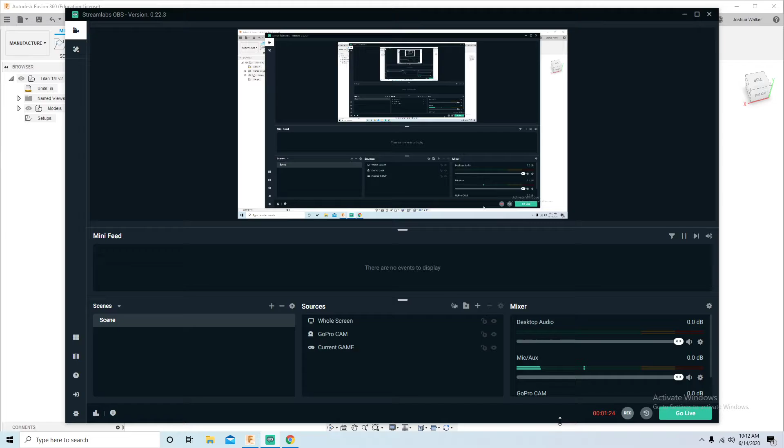This is going to be the CAM tutorial for Fusion360. This is going to be a multi-part series. So today I'm going to be using the Titan 1M for my model example. We're going to be going over how to set up your model to ensure that you're machining off the correct plane that you need to in respect to your print.

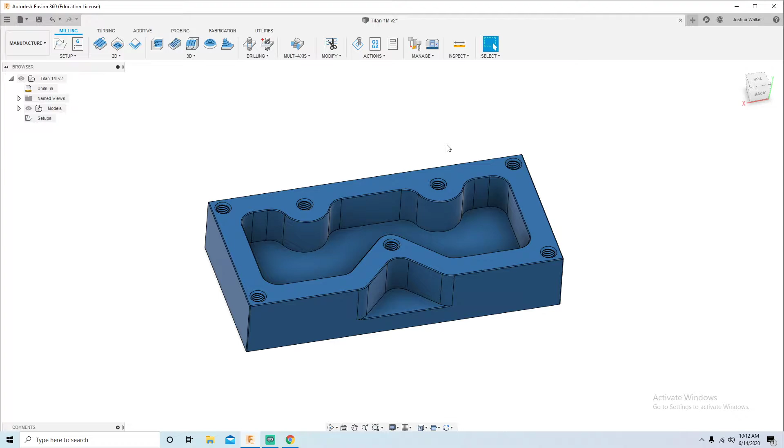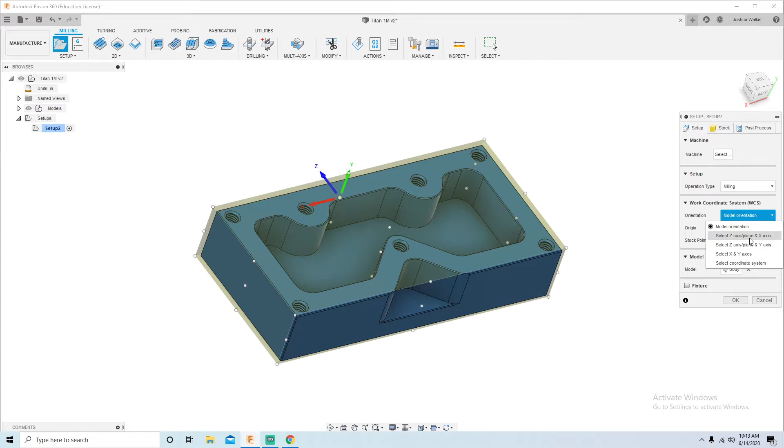So the first thing we want to do is go into setup. And you'll notice my plane is nowhere near set up correctly. I want this to be the top of my part. So the first thing I'm going to do is go to model orientation here. I'm going to select Z-axis, plane, and X-axis. So this is going to be my Z plane. This is my X plane. What this does is move your coordinate system into the right location physically.

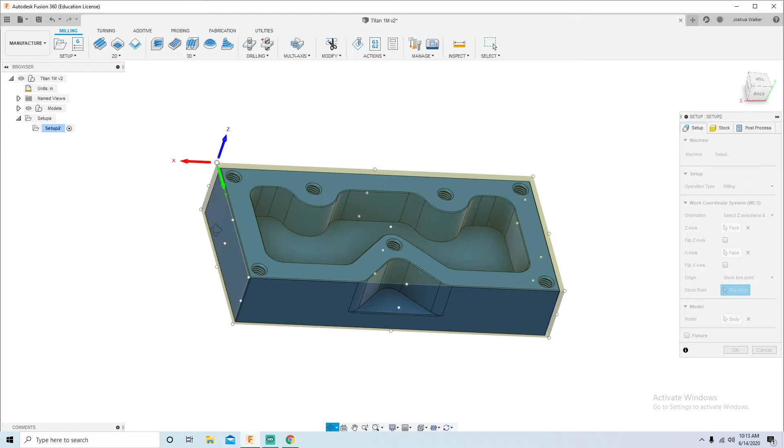Now at this point we need to select where we want to actually machine from. So like when you're using your edge finder and you want to use this wall and your back wall and you want your upper left hand corner to be your physical start point, you want to select box point, then go up here and select this location. Now you'll notice when we look at our part, let me get to a little bit better view here. Now when we look at our part in the machine, we are now correct.

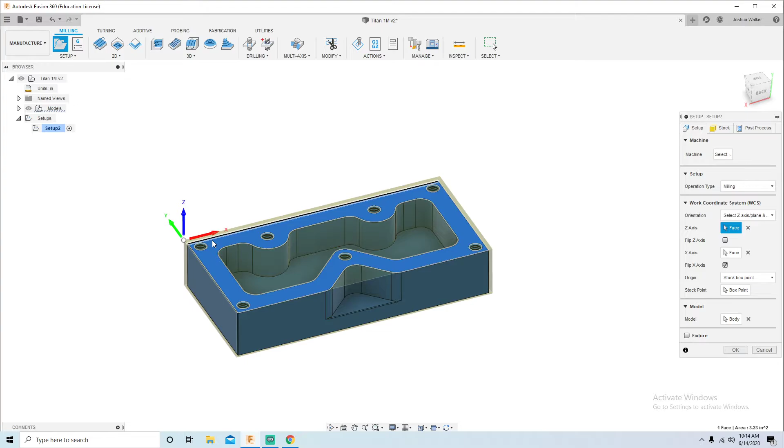I like this orientation a little bit better personally, where my X is going this way, my Y is going this way, and my Z is traveling straight up. And to change that, the only thing you have to do is click on the very tip. See that tip highlights blue, and that's true for all of them. The Z is kind of hard to see, but it is highlighting blue.

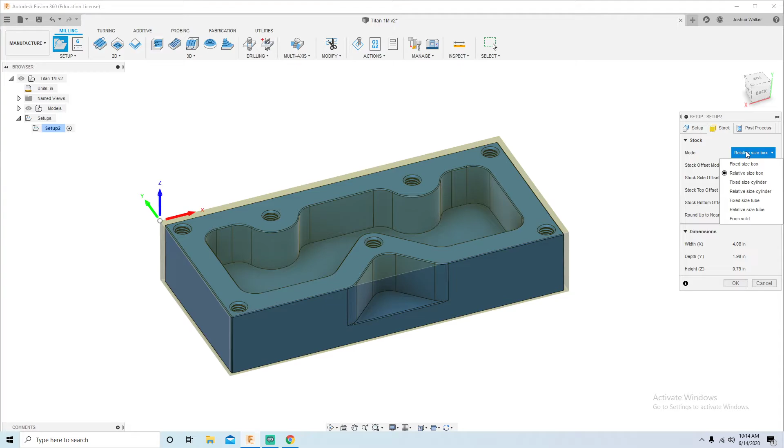Now at this point you need to set up your stock. So under the second tab, you've got stock, and then you can do a relative size. You can do fixed size, fixed cylinder, tube, solid. The from solid is actually what you model. So if you're starting with a casting or whatever, you can select an actual model that you would like to use. I like to use fixed size. Generally, material comes in pretty standard sizes.

So at this point, this part is 4 inches long. So on the saw cut, I would want 4 1/8, so 4.125. And then our Y is going to be 2 inches because that would be a standard size. Our Z would be 1 inch because that would be a standard size. And then instead of going from model position, right now, if we look at the side of our part, our model is in the middle of our stock. The yellow is actually our stock.

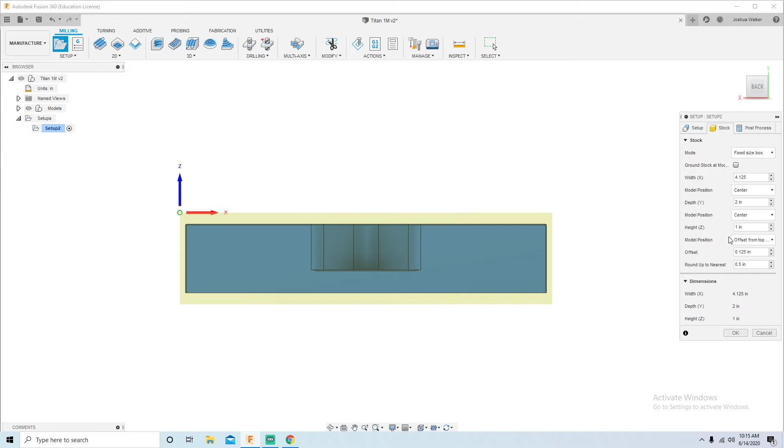So for what we're doing, I want offset from top, and the offset of 1/8 of an inch, I want to change that to 10 thousandths. 10 thousandths is a decent starting point on the first side. You can adjust that as you're working or what you're doing in the machine, but for the most part I always use 10 thousandths or 20 thousandths. Just depends on what I'm doing.

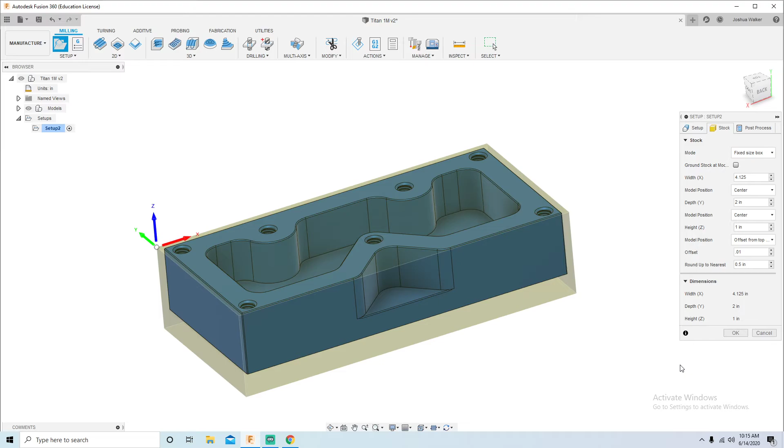So as a little sanity check down here under dimensions, you'll see X, Y, and Z. We see our 4.125 by 2 by 1. We double check what our model is. If we're happy with it, we're good.

Something else to mention is post-processing. Right here you can actually change your program number. I do advise doing this just as a simple later on sanity check. When you do post a program, you've already got your program number in there, nothing to change, and your programming comment, I'm going to put this as sample. And that's pretty much all I change here.

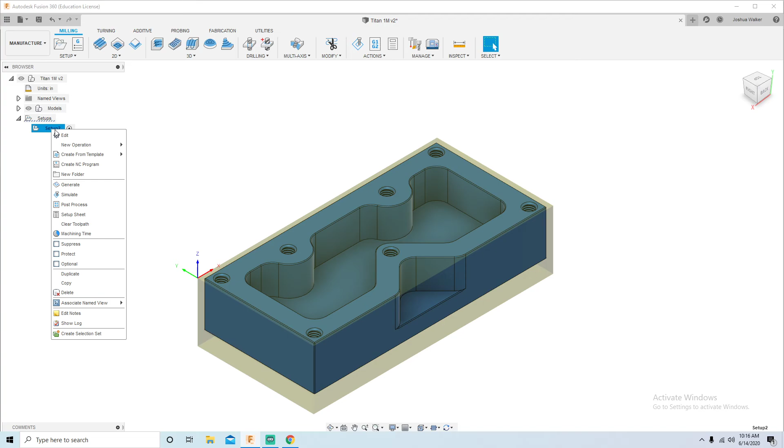Once you click OK, you'll notice that your coordinate system can no longer be clicked, and then your stock is ready to go. So this is how to set up a mill piece on Fusion360 for the setup. I'm going to be making another video on turning, completely separate.